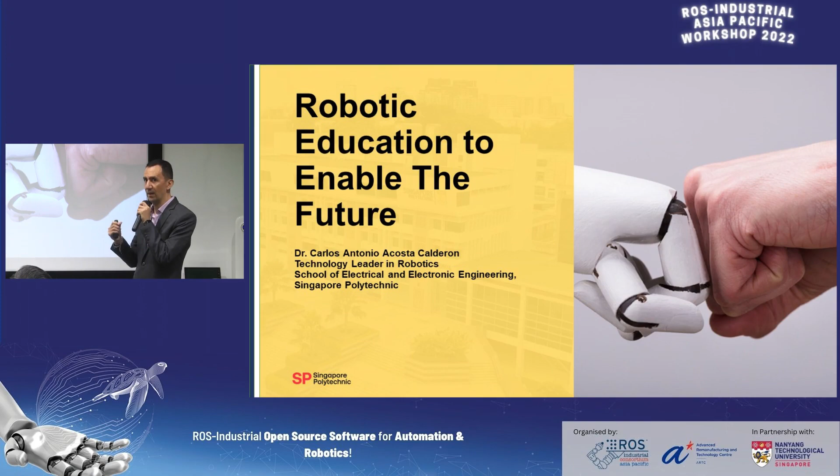Mainly, I want to talk about something important. First, thank you to all the presenters, because you've been giving a lot of different information about what makes the whole ecosystem in robotics, especially on ROS here in Singapore and in the region, with international views as well. That's fantastic. But I want to talk about education, and how we bring engineers into this area.

First, let me quickly introduce Singapore Polytechnic. We are the first poly established here, in 1954, and we have more than 13,000 full-time and part-time students. We have 30 full-time courses, and in the School of Triple E, we have 10 co-location labs.

In these co-location labs, we engage companies and develop projects together with them for different purposes. For us, it's important to serve the industries, as well as to give opportunities to our students to learn in real projects. I think that is exactly where I want to come into this picture.

We've been working with different types of robots - mobile robots, humanoid robots, service robotics, and industrial robotics. We have a group of about 15 staff, a multidisciplinary group with people from mechanical, electrical, electronic engineering, and computer science, working on these robots.

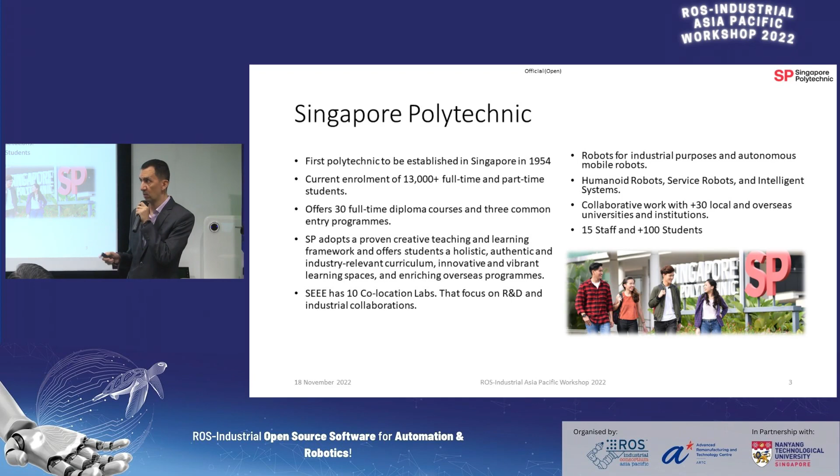One of the things I wanted to emphasize is: why do we need engineers? I think it's interesting. I want you guys to look at this graph. Dr. Chan presented some slides, but I want to bring this one - it's from 2015.

The important thing about this graph, which people find fascinating, is that we always refer to Singapore as a small dot. But if you look at where Singapore is located, it's actually here - not such a small dot on this map. What this map tells you is that a worker here in Singapore, in his lifetime working here, is going to have a chance to see robots, compared to somebody in Iran or India, where you have only like 2 robots. Those guys might work their entire life and never see a robot.

But like I mentioned, this is 2015 data. I wanted to show you a more recent one. It says that now we have about 6 robots per 100 workers, which means we went from almost 4 robots per 100 workers to now 6 robots. So that means it has increased.

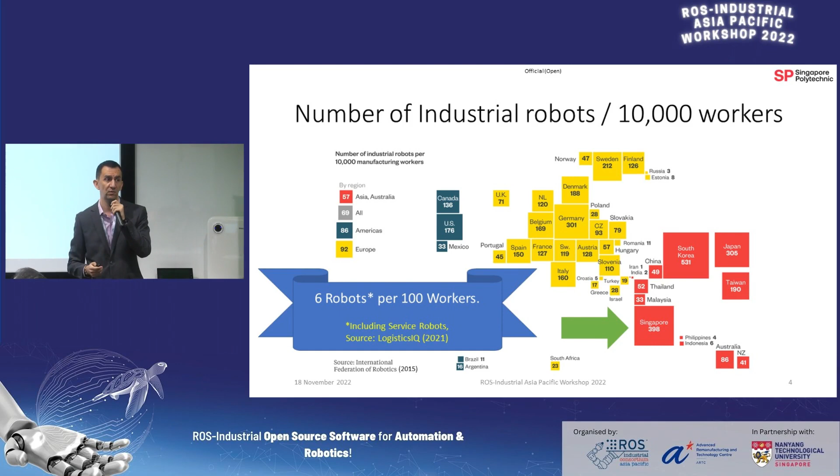One of the things I want to emphasize is that, yes, we talk about this, and we also know the challenges for the future. We know that the population issue, not only here in Singapore, but we also hear that in other countries - we know that in Europe this is also a big problem. There's going to be a shortage of people. But how do we deal with it?

Yes, we are all listening here, and probably this is also a little bit dangerous, because it might be like an echo chamber, where we always say robots are going to help solve this problem. Yes, but one of the things I want to emphasize is: who's going to be the engineers dealing with these robots? I think this is an important thing, and I want to say why this is important.

Because working in the education sector, I've been firsthand looking at people who come into the engineering domain, and once they finish their diploma, they don't continue in engineering - they move to other domains. This is a big problem, because I do have requests from companies sending me emails saying, please send me your graduate students, we want to hire them, we want to engage them, we want to maybe take them for internship.

We want to hire them for internship or all these things, but then the problem comes that these guys are not interested. So we've been thinking that an engineer should be fearless, and we've been thinking how do we create a fearless engineer. For us, the vision of a fearless engineer should be an engineer who is not afraid to try new things. This sounds logical, but it's actually difficult to achieve, because we've noticed that most engineers don't want to work on something challenging because they are afraid to fail.

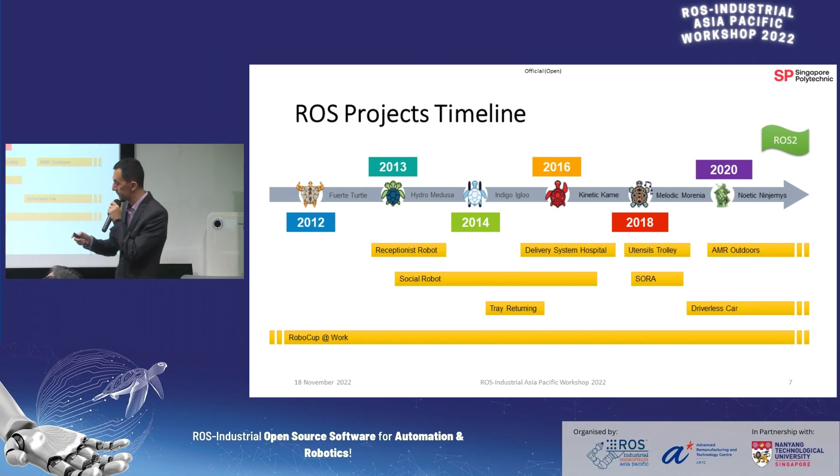So one of the first projects where we start introducing ROS was this robot, which is basically just the torso of the robot. The idea is for it to be a receptionist, so we can put it at the reception of an event, and it's able to interact with you. The main thing we were doing here was using the Kinect to detect the person, and also some basic face recognition with OpenCV and other tools.

When we tried this project, we were not very familiar with ROS, so we felt it was very hard at the beginning. I remember the students and staff working on this mentioning it was difficult because they were not so familiar with how ROS was working. What they were doing was trying to create one single program for everything, but it shouldn't be like that. The ROS model is mainly to have different nodes, and the communication between the nodes is what gives you the emerging behavior you're looking for.

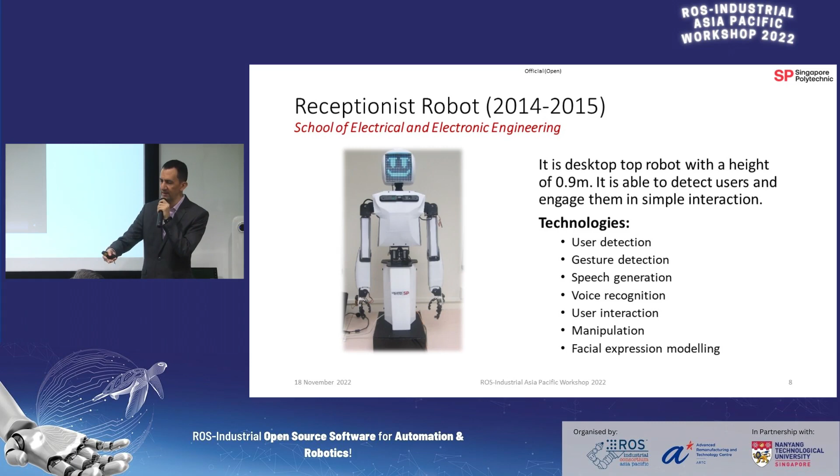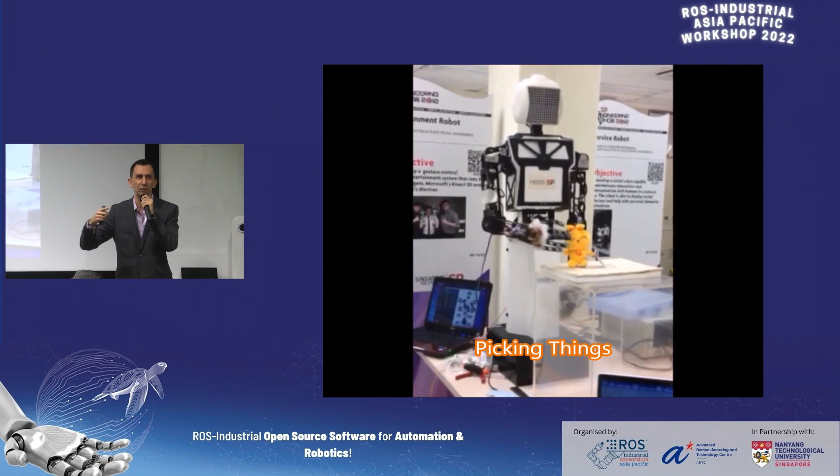But we did learn a lot from there, and I have a small video to show you some of the features we got with these robots. For this robot, we developed our inverse kinematics by ourselves, and two years after, when we learned about MoveIt, we actually tried that as well. It was nice to see the students learning with ROS, and this project ended up lasting almost 3 years, about 2.5 years.

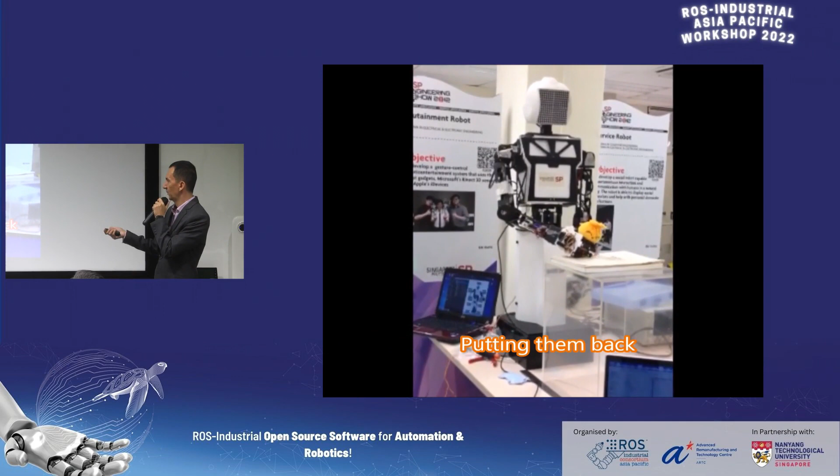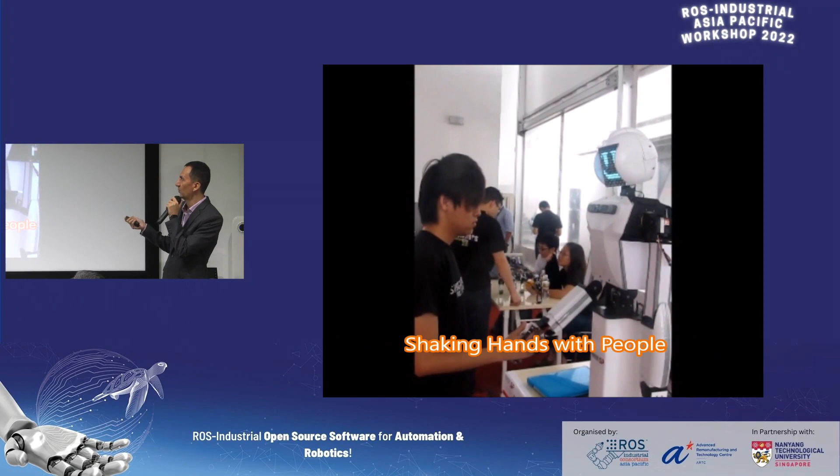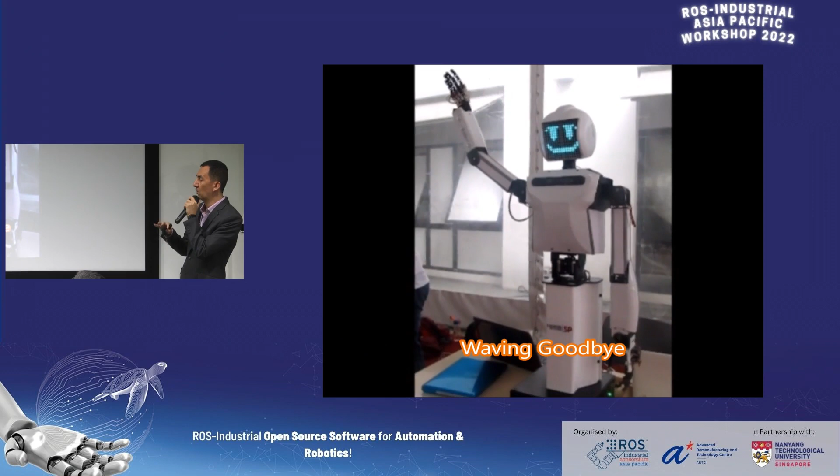The students kept making progress, and a lot of what they were doing was using a computer to send signals to the ROS system to start, stop, or do certain things. After that, we let the interaction itself do those things instead of just sending signals from the computer. So we were learning how to make more modular programs as well with this project.

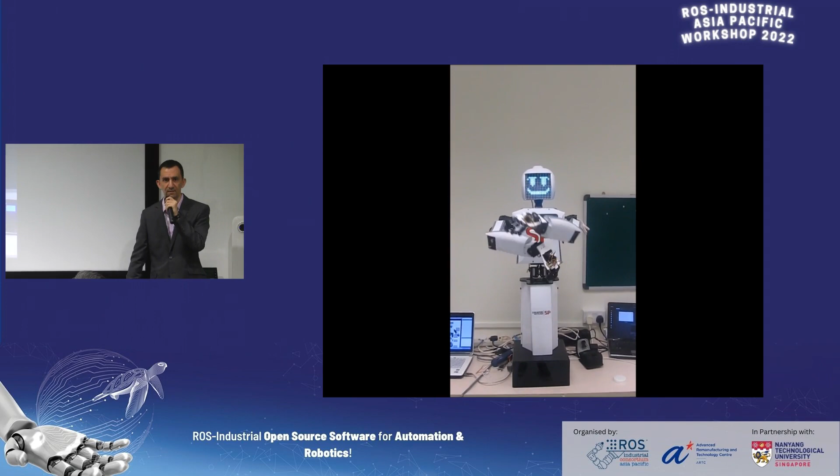Okay, let me show you very quickly the robot dancing. We did some dancing as well. At that time there was this Gangnam style, so the robot tried to do the Gangnam style. This is exactly what I'm talking about, because the students were excited, they said 'I want to try the Gangnam style.' Yes, which is good, come try things. Let them go crazy, because this is the time they should go crazy, since that's how they develop passion.

So then we had another project here, similar in concept, also a social robot. The top is similar to the previous one, except we also have a mobile base. With this one we did more on the ROS navigation stack, and learned more about how to create different modules. This was a large, multidisciplinary project with people from mechanical, computer engineering, and electrical electronic engineering, developing different things. There were different nodes, and this project stretched for about 2 years, almost 3 years as well.

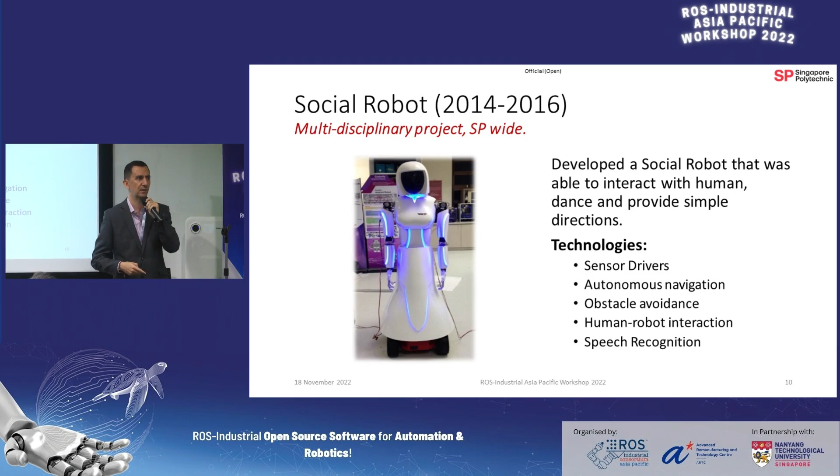In this project, the students managed to create different nodes, and some of the nodes needed to be upgraded. We also used a couple of versions of ROS, two distros, which was quite interesting because we moved from one distro to the other. We thought it would be straightforward, but it turned out it wasn't. That's also something we learned, but it was nice and a lot of fun for the students, because they were exploring things, and we had interaction when we presented the robot.

The next project I wanted to show you, from which we learned more about navigation, was a tray-returning robot. We developed this together with the National Environment Agency, because they were asking if it was possible to return some of these trays. So we explored it and tested it in our campus facilities, and it was nice.

They saw it, they liked it, we collected the data for them and everything, but they told us they're not going to deploy it because they wanted to deploy it in hawker centers, like Newton, which is not entirely flat. For foreigners, probably you might not know, but Singapore is not entirely flat. So that was a bit of a challenge, but it was good for us because the students were very happy, and this robot was actually moving around the campus, and it also kept fostering the rapport between the juniors and the seniors. The seniors were very proud to say, hey, this is my robot.

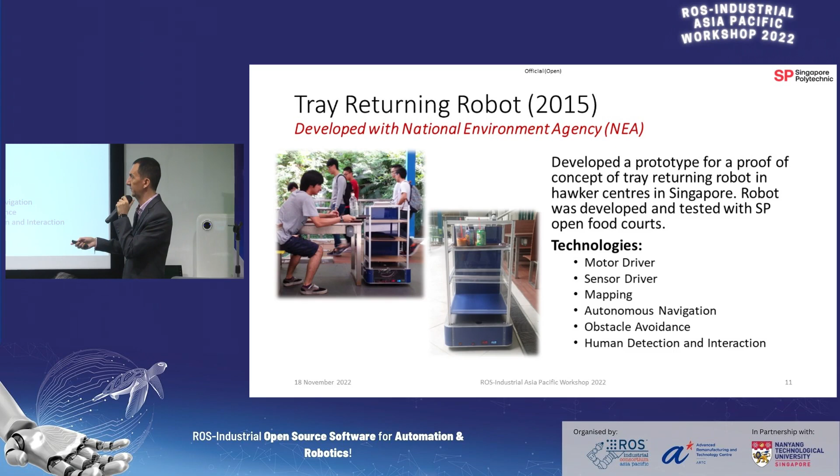And the juniors were like, oh, can I join your group? Can I try next year? And so on and so forth. It was quite nice. So we extended for about 2 semesters, and we got a very nice number of people that actually signed up for this project, which was fantastic. We loved it, and it was fast to do because it's just navigation, a navigation stack. So we just adapted most of the things from the Turtlebot navigation stack.

Then we also did this one here, which we call an automated delivery system for handling lab samples in a hospital environment. Basically what it does is we have a mobile base, and we get it to move from one station in the hospital to another station. The thing about this one is it's very similar to the previous one, but with this one, the students were excited because when we were going to the hospital, they wanted to be there. All of them were very happy. They wanted to show the project, and a lot of people still turned up for this one.

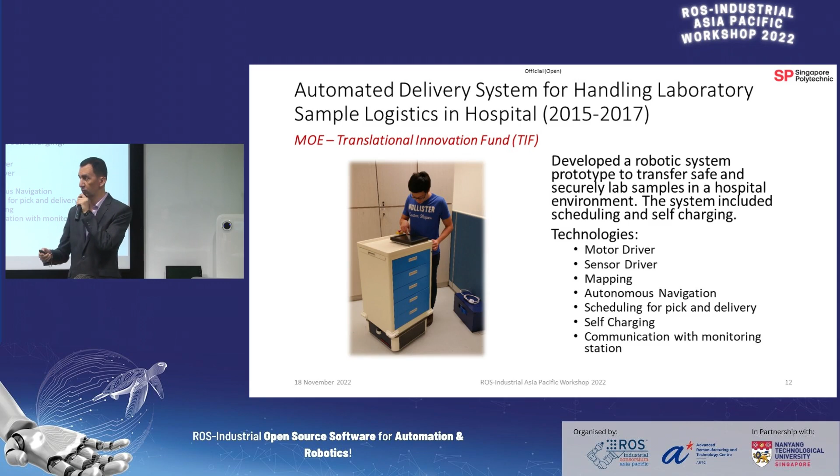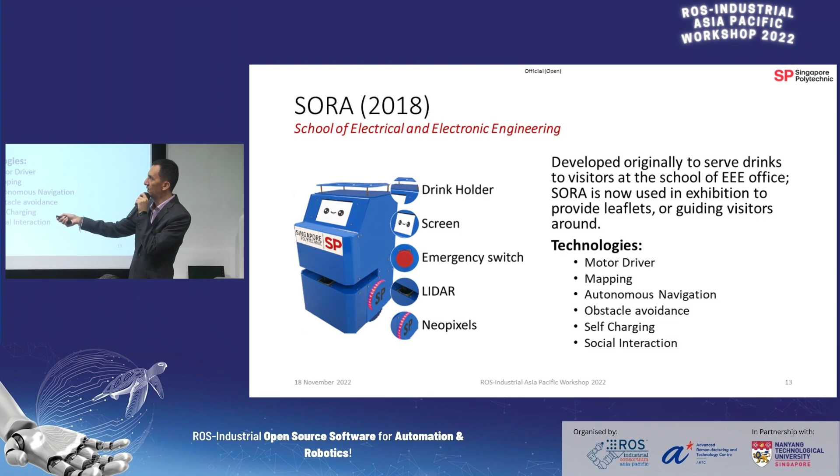The next one I wanted to show, which was one of the stars, is this one. It really attracts a lot of people. Why? Because with the other two, yeah, we can do navigation and all these things, but we also learn about the interaction. We liked those social robots in the past. And what they did is they put this little screen in here, and it gives some interaction. So let me just show you a video. This just got there, it's just some details. So let's see the video there.

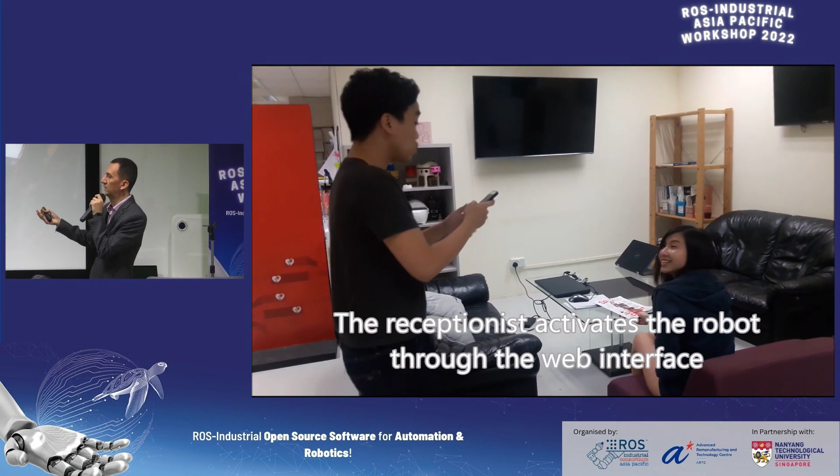It was just very simple, but what the students did is they didn't just stay with the navigation stack, but they went a little bit further doing the ROS bridge, the web bridge, and they created an interface, and they were able to load it on the phone, as well as on their computer, to control the robot and other services. We actually deployed the robot in our school office for EEE, and that robot was running there for a couple of years until it broke down, so we had to put it in the museum. But it's an interesting robot, and it was a very simple concept. So we were very happy.

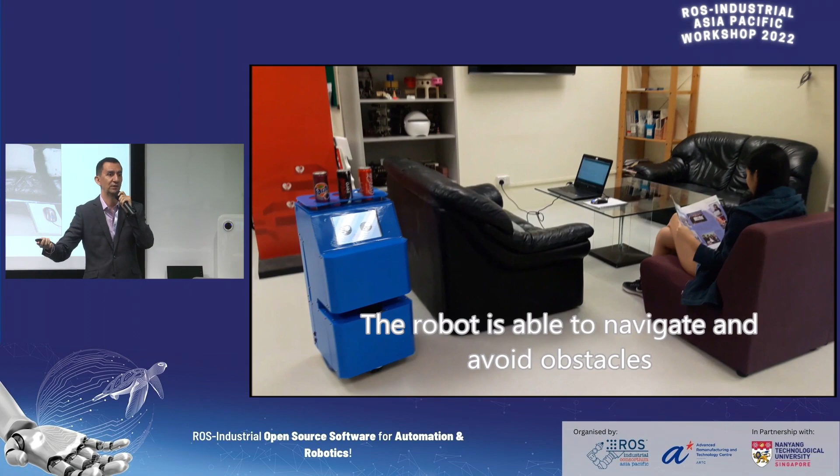And the students from this project, these guys, they're actually finishing their university now, and they are going to start a spin-off company on robotics. Yes, I met them, and they told me that. That's fantastic. The lady here, she already has a job, still in robotics, which is good. Fantastic, continue, that's what we want, right? They were very happy developing those things, and now they continue in the area of robotics.

So we also developed some other projects. This one was with IMDA, and it's basically to automate the utensil trolley that the aunties have to push from one side of a food court to another side where they can do the washing of these utensils. It was not so challenging for us, in the sense that it was just the mapping, but what we find out is that...

...it's actually quite challenging to deal with a lot of humans moving, yes, with a lot of humans moving. And if you look carefully, even robots nowadays in the airport and shopping malls and all these things, our robots look clumsy.

And I think this is also a challenge that I want to send back to you and also to bring back to me. We need to make our robots a little bit more smart when they move, because they're very clumsy when there's a lot of people. How to deal with those situations? It's just a question on the floor there.

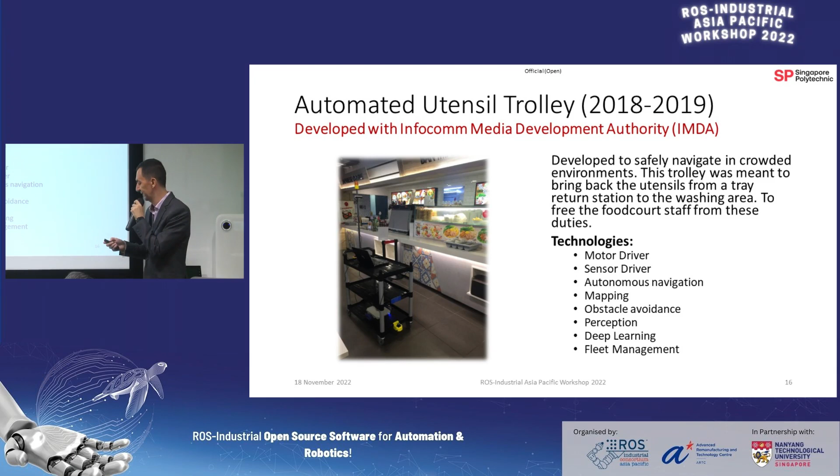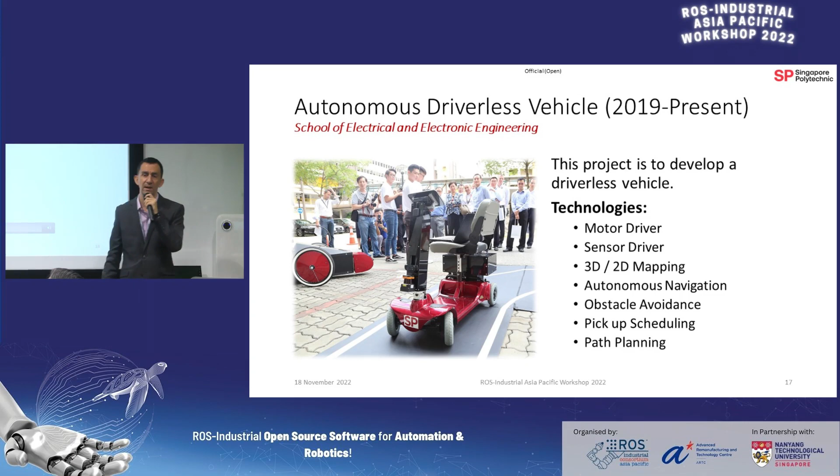So the other project I want to show you, which is still running and attracts a lot of students, is the driverless car. Well, we call it driverless car. We started with a mobility scooter, and now we have a buggy, using ROS in this one. I'll let my colleague do the talking.

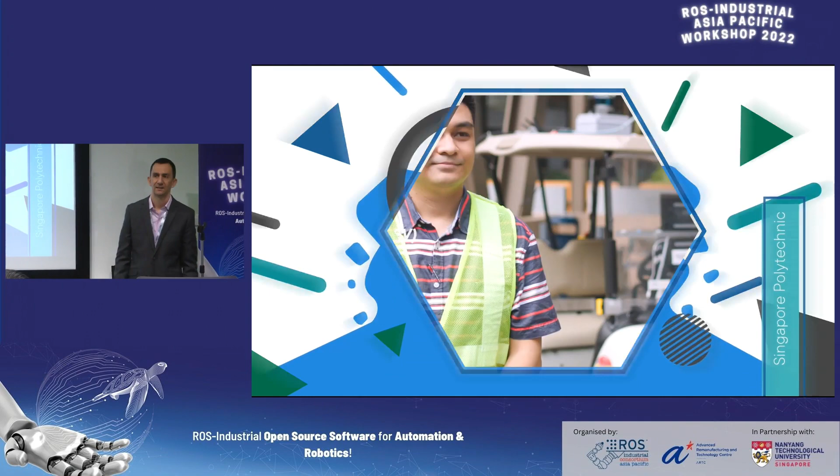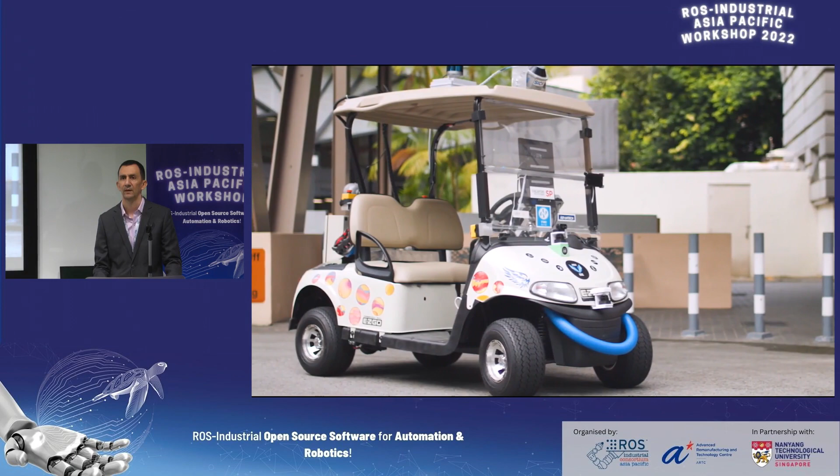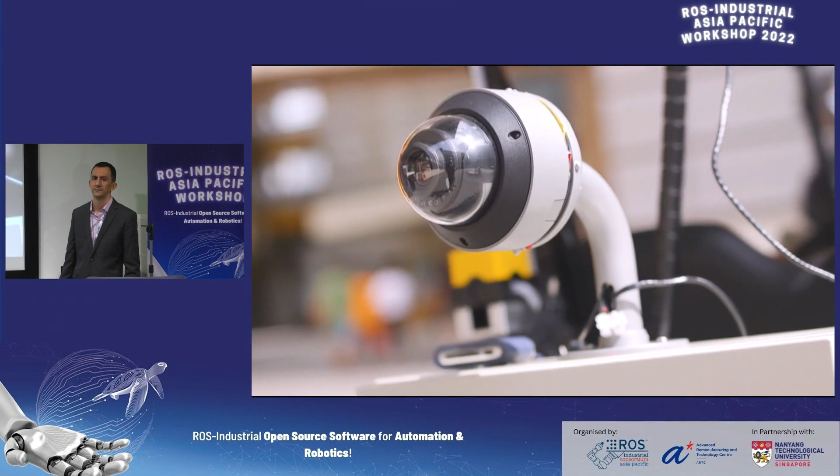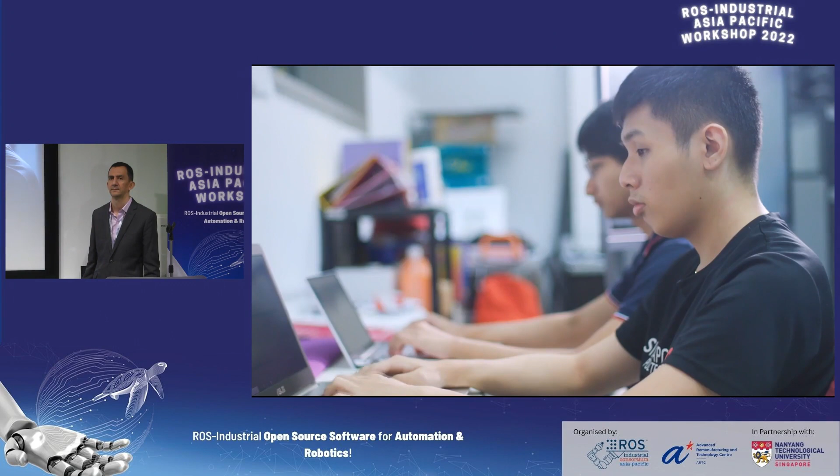Outfitted with GPS, LiDAR navigation systems, a wide range of sensors, and 5G wireless communication technology, our very first autonomous surveillance vehicle is being developed in Singapore Polytechnic by a team of Year 3 project students and dedicated lecturers. The vehicle is designed to sense its environment and navigate safely without human input. Passengers can book a ride on our autonomous vehicle via mobile applications on their handphones and enjoy secure transactions through a digital cryptocurrency payment option using a blockchain network. The autonomous vehicle is also equipped with condition monitoring systems using several embedded sensors to ensure that it is operating at optimum conditions.

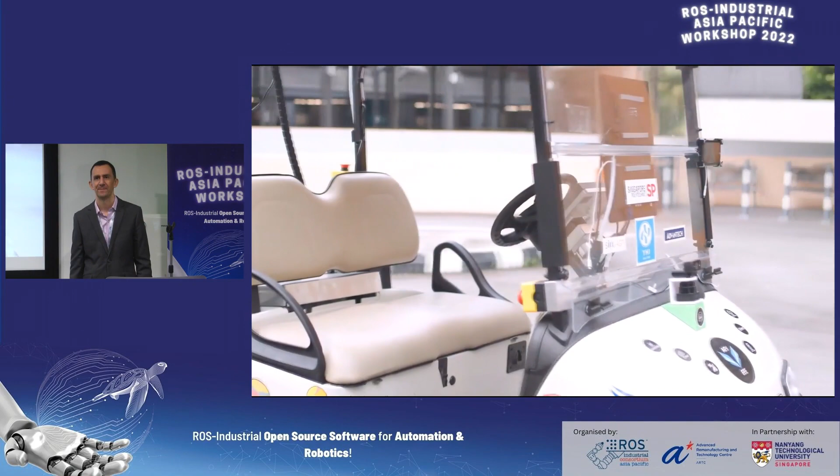So you can use it with, not Bitcoin, but other currencies. That's an interesting thing. It's crazy that the students started this, and it's attracting people that were purely into computer engineering, and now they're coming and getting involved in robotics, finding their flavor as well. They say, oh interesting, okay come in, welcome.

Everyone is welcome, because this is a multidisciplinary area, right? So the next project I want to present to you quickly here is also a delivery robot. We have this delivery robot, just let me show you the video.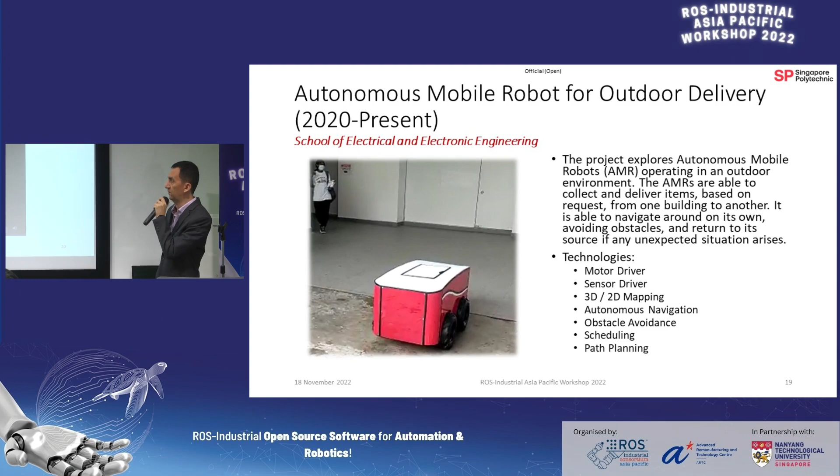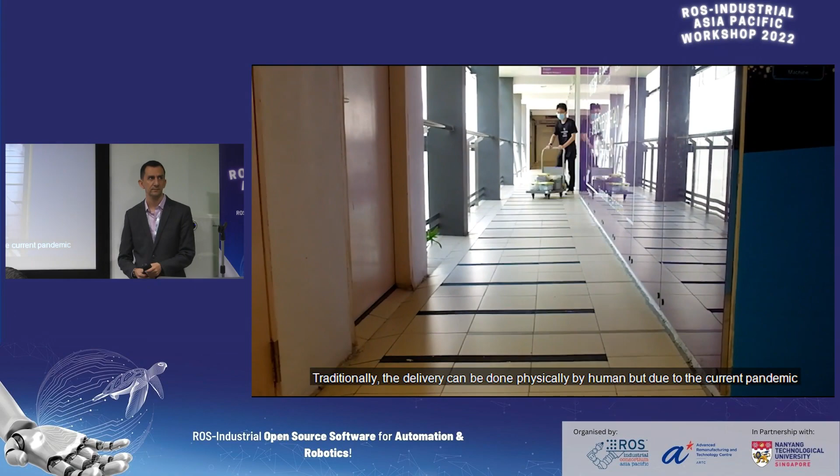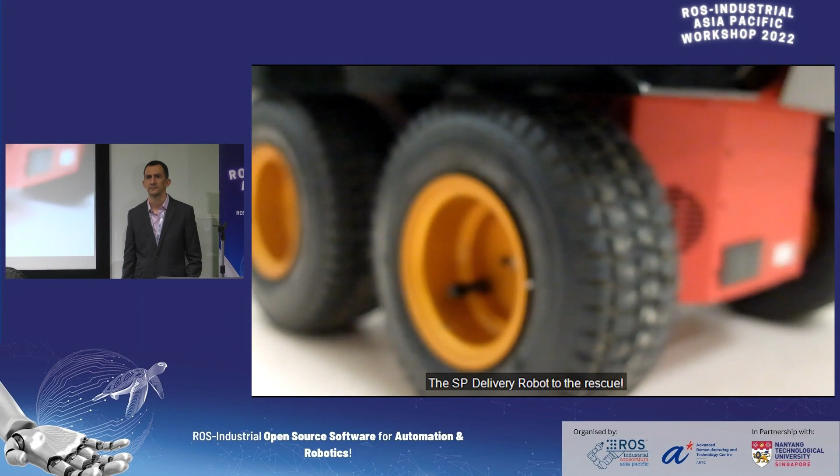Big organizations, especially those with multiple departments like production, warehouse, and so on, tend to have more than one building within their premises. Traditionally, the delivery can be done physically by human, but due to the current pandemic, the physical contact between humans should be reduced or even avoided. The SP delivery robot to the rescue. It is an autonomous mobile robot, AMR, that is capable of operating in an outdoor environment.

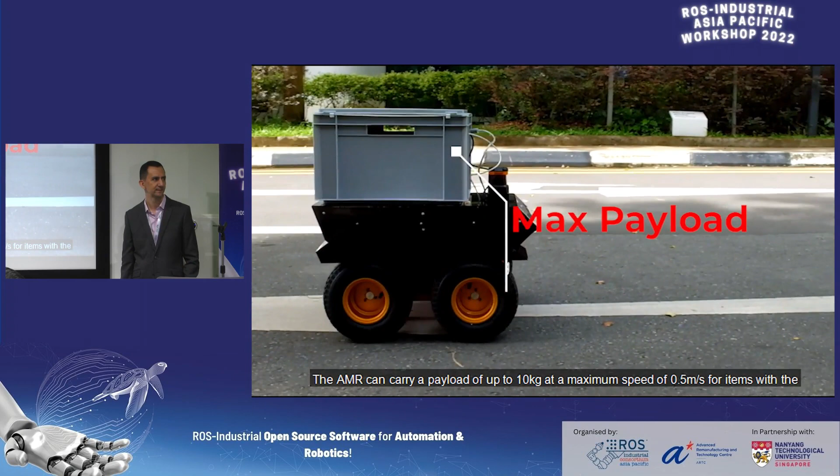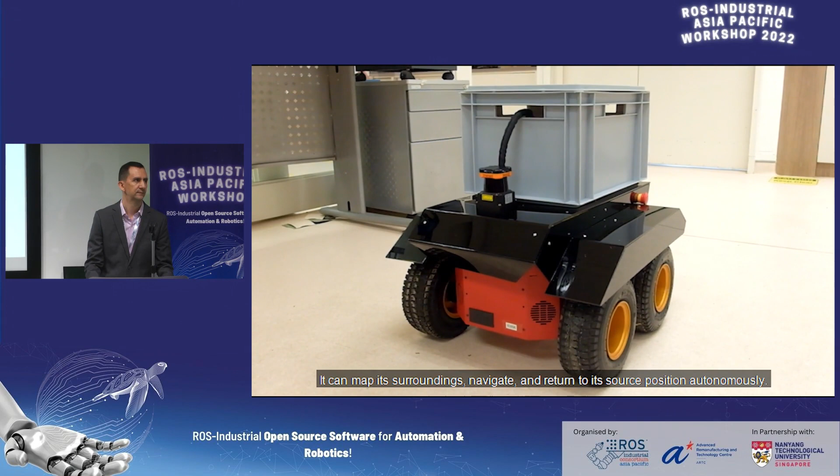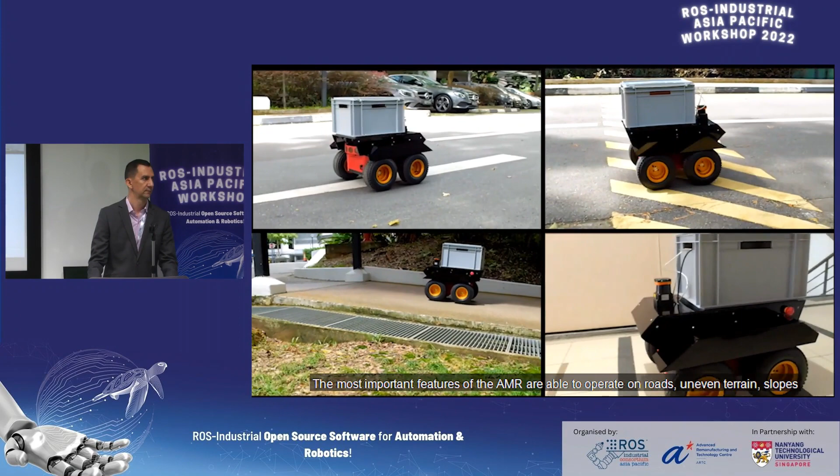The AMR can carry a payload of up to 10 kg at a maximum speed of 0.5 meters per second for items with the size of an A3 size paper. It can map its surrounding, navigate, and return to its source position autonomously, using high-resolution LiDAR sensors. The most important features of the AMR are being able to operate on roads, uneven terrain, slopes, and narrow hallways.

So one of the things about these two projects I just presented is they started with very simple commercial robots or simple bases that we adapted into robots. But these projects grew. For example, for the one I just presented, now we have a robot that we developed together with the School of Mechanical, because their expertise is on the mechanical side. So they developed the hardware base.

The computer engineering team works on the program, electrical and electronics developing the control, and so on and so forth. We're also using, as you saw, a Pioneer robot, and some Western robot platforms in there. So we have different bases, and we have big groups of students now working on these ones.

The last project I want to talk about is probably the one from which we have learned a lot about ROS, and also contributed a lot of ROS work back into the community: the RoboCup competition. For this RoboCup competition, I'll show you the video, so it's much faster in case you guys are not familiar with RoboCup.

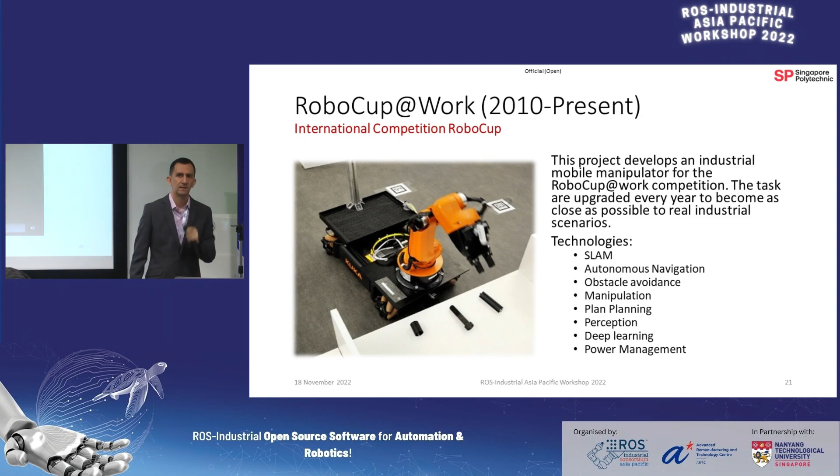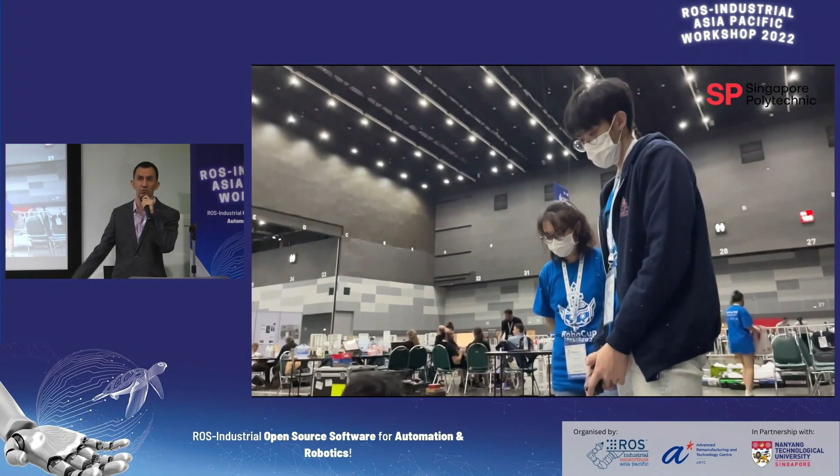So the first part of the video is about the competition. This competition is similar to an industrial setup, where a robot has to go from one station to different stations, picking objects and placing objects in those stations.

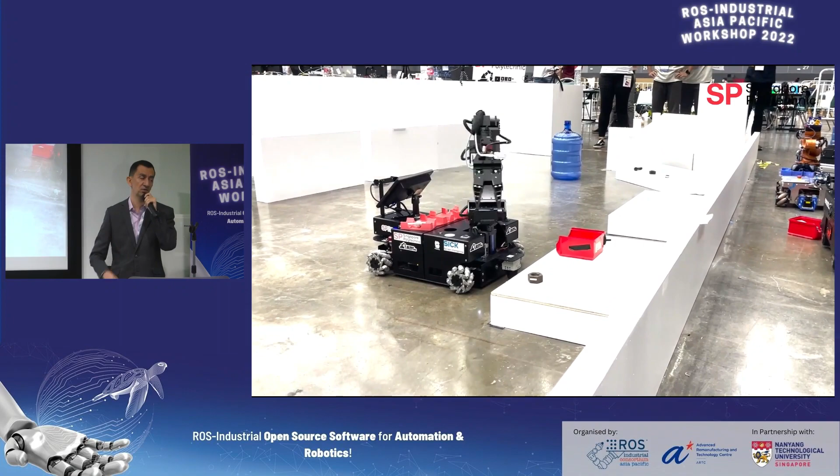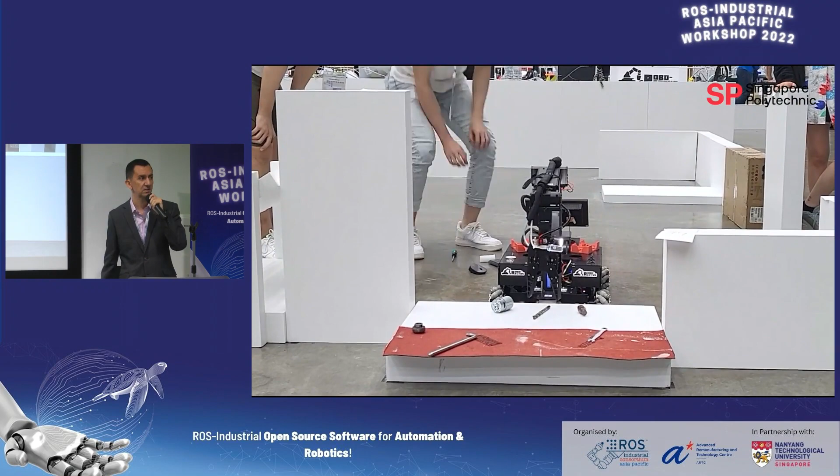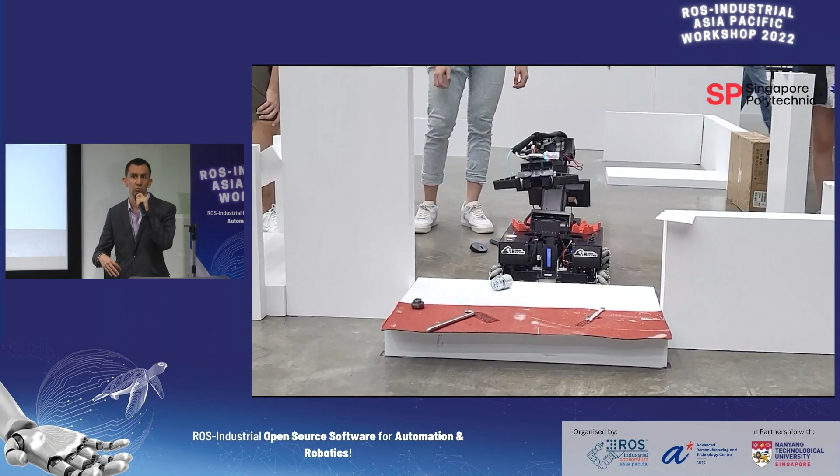The height of the stations is random, so the robot doesn't know what's the height of the station, so it needs to deal with that situation. And then the navigation, the map always changes. It's allowed to put obstacles along the way, so the robot needs to be able to recalculate the route and go to another location, find the other location.

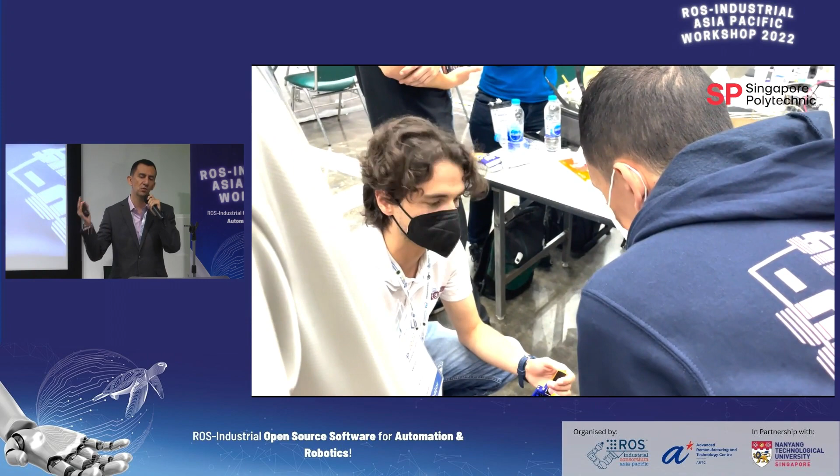The other thing as well is the identification of the objects. It's also allowed to put decoys, so the robot needs to be able to find out what is the correct object that they need to find.

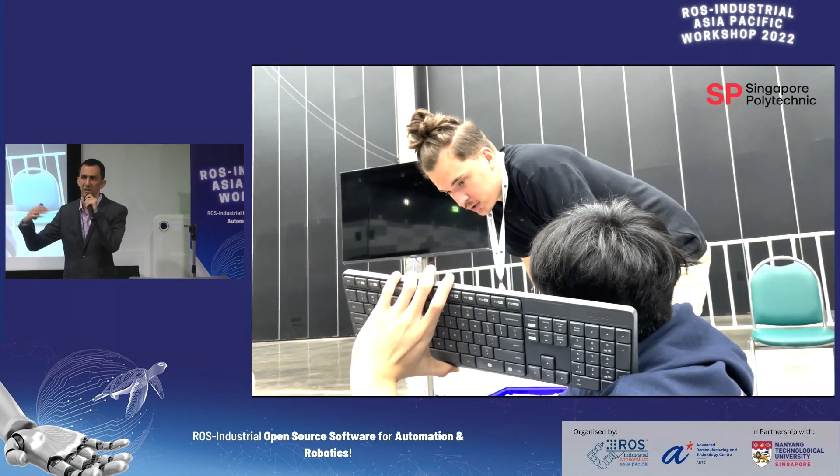One of the things that we love of this project is that we take our students internationally. So this is in Thailand, just this year, early this year, in July, we took our students there, and they love it.

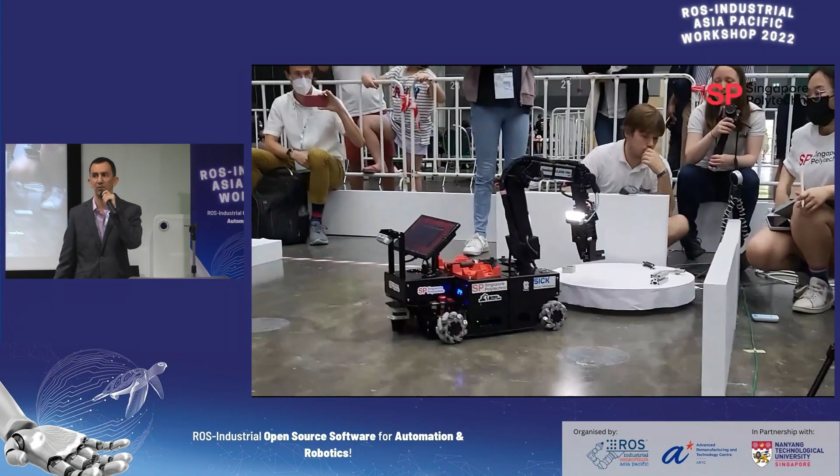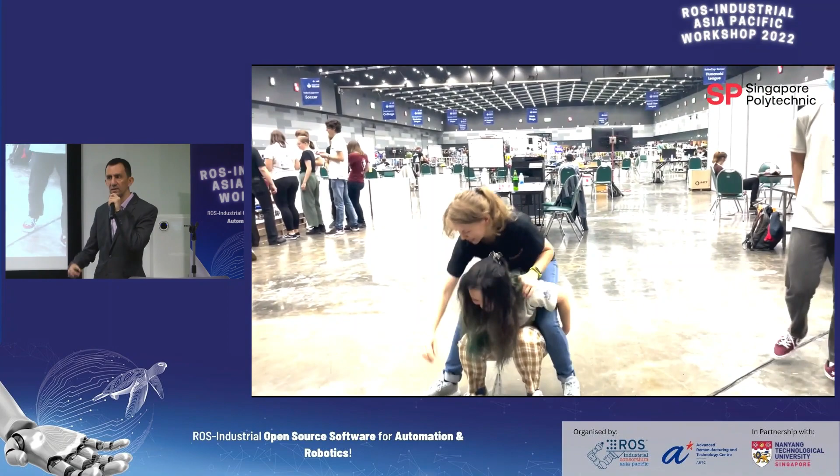There were not many teams as before, of course, because of COVID restriction, and at that time China was also closed, so not a lot of teams were there, but the students love the experience, and the students love to collaborate with people from other countries, from other universities, and to learn from them.

Yes, because that is a very important thing for the students. So the students are always coming and they say, hey, we want to participate in these things. I let my student here. I want you guys to hear some of these comments.

Although my team faced many challenges along the way, we still managed to work together as a team and did the best we can with whatever we can. I also learned a lot this RoboCup competition by looking at how other teams work, and they were very professional. So it's a very good learning experience.

My experience with RoboCup 2022 is very interesting, because I get to see many different leagues of the RoboCup tests, and also get to see different kinds of robots around, and get to see what they do or the different things they can do. So as for the competition that I'm doing, I learned a lot about the other teams and get to know more about how their robots operate, and also how we can improve on the robot.

So for this particular RoboCup competition, we always get a lot of students. And these students, we take them from year one. Their project, or final year project, or internship is actually in year 3, only one semester. So from year 1, we already take these students, because the seniors teach the juniors.